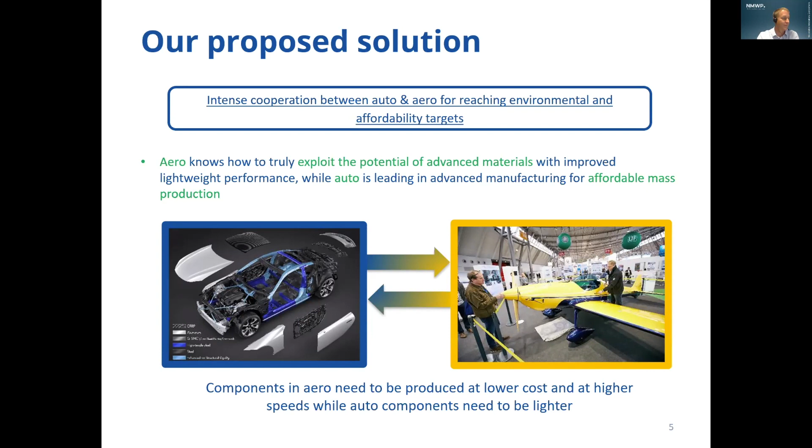We have the opinion that components in aero need to be produced at lower costs on the one side and at higher speeds, and auto components need to be lighter to reduce carbon, for example. So the main objective is to increase the competitiveness of auto and aero SMEs. It's about delivering new lightweight solutions that meet environmental and affordability targets, supporting auto and aero SMEs in improving their lightweight products and technologies to meet car and aircraft makers' needs, and setting up a transnational ecosystem that connects stakeholders from both industries to boost cross-sectoral transfer of knowledge.

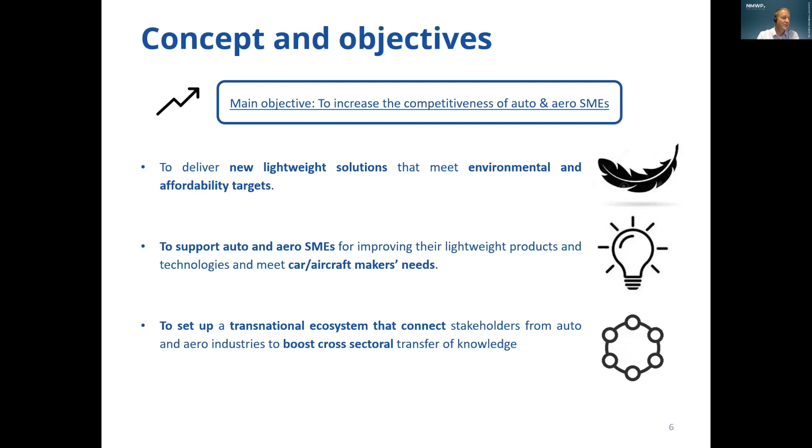Now, how would we like to do this? First of all, we have these challenge-driven competitions. We have international enterprises who provided challenge-driven competitions to us. Thematic challenges proposed by end users and large suppliers from automotive and aerospace sectors. And now the small and medium enterprises can apply with an innovative solution.

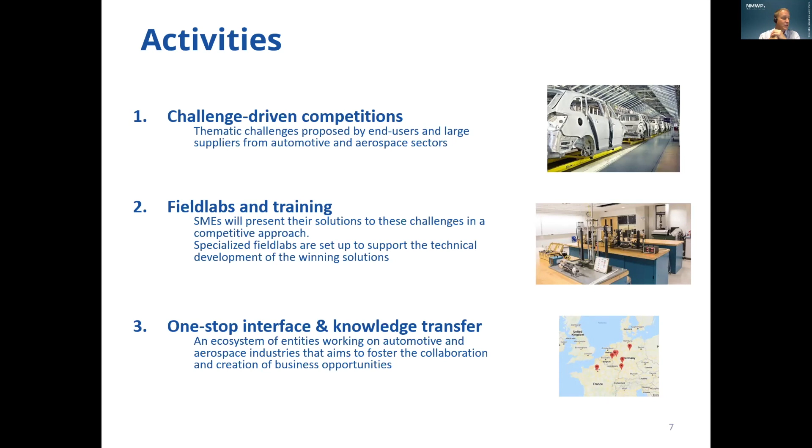The next activity is our field labs and trainings. We provide the possibility to present the solutions to these challenges in a competitive approach. And specialized field labs are set up to support the technical development of the winning solutions. There will be a jury which will award the solutions provided. And then next, we will have a one-stop interface and knowledge transfer, which will be done online in a tool provided by us, NMWP.

And I think this is RIGHTWEIGHT in a nutshell. We have two industries very dependent on lightweight, which should benefit from each other from the solutions they developed. Before we come to the challenges, we would like to introduce the KIT on the one hand and NMWP.NRW on the other hand. So now I would like to hand over to the presentation of Markus Spadinger, who will present the KIT and give a short overview about the state of the art of lightweight constructions.

Is that right? I think so. Yes, it is. Thank you, Henrik. Perfect.

Very good. So yes, I'm also a part of the RIGHTWEIGHT consortium. I also initiated parts of the project back when we first met in Brussels almost 2 years ago, I think. And now I want to start with a short presentation on the KIT, especially on the IPEK. This is my institute where I'm working. My name is Markus Spadinger, as Henrik already introduced me, and I'm chief engineer here at the IPEK, and I'm responsible for the CAE optimization group as well as for the development methods and management group. I'm trying to share my screen, should be possible, I think.

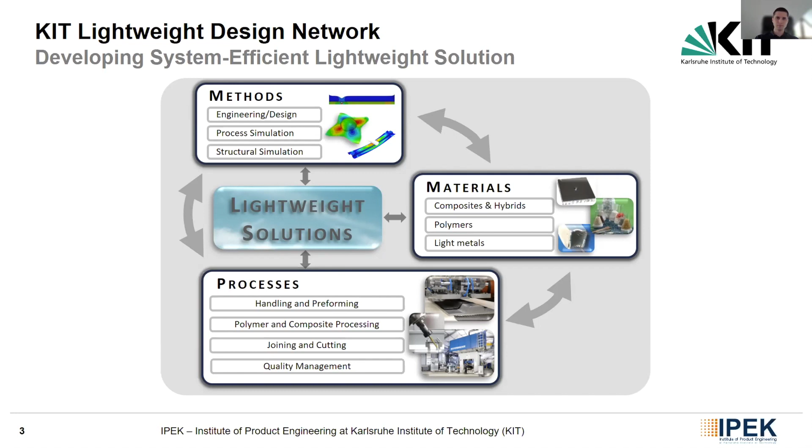But why is lightweight design still, or especially today, that important? I brought here some numbers. I updated it this morning to look into the numbers of 2020. 2021 is not available yet, but I think it's pretty impressive that over the last 60 years, we doubled the mass of our vehicles, and we also increased the power of our vehicles by a factor of 4.

And I think looking at the higher mass shows us that it is necessary to be more efficient in the future, that we have to find new lightweight design solutions, especially for battery-driven vehicles like a BEV or plug-in hybrid vehicles. We need to find solutions for the higher masses of the batteries that we have to carry around in our vehicles today. I think an important part of this development is caused by the fact that we need to include batteries into our vehicles today.

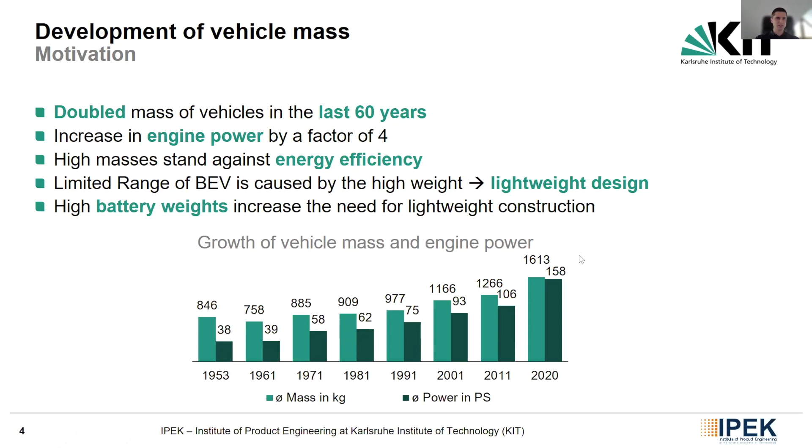Those are, of course, numbers from the automotive industry, but this also applies in many cases for the aeronautic industries. Today we are thinking about having batteries in airplanes as well. We need to find solutions then to minimize the weight of our aircraft as well. And this, I think, is the same reason for lightweight design approaches, as we can see it all over.

So here just one example of the projects we worked on in the past. Of course we need new structural materials as they had been included in battery electric vehicles like the i8 from BMW, but as well the i3, for example. But this is only possible if you include new construction and design methods, so that you have engineers that are able to apply those new materials to their specific use cases and to fulfill specific functions.

So from our point of view, lightweight design influences all activities in the design process. It's not just about replacing material. It's not just about having a new manufacturing process. It's all about having the right engineering process behind it to be able to exploit the full potential of lightweight design.

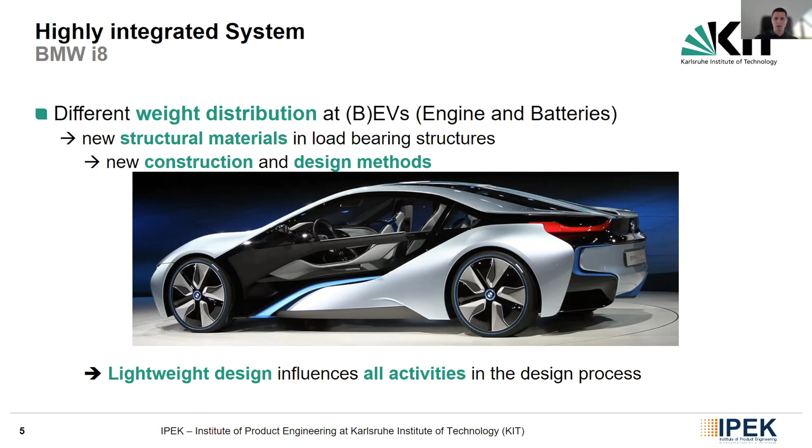Another example we worked on, and I want to use it to emphasize the different lightweight strategies that are well known to develop new vehicle generations. I'm talking about product generations in my short presentation. That means we are not developing our products from scratch, not based on a blank sheet of paper. We always start to develop based on reference, on previous product generations, on predecessor systems.

And of course, when we have the challenge to reduce the vehicle weight, we can change material. We can change the connections between our different components and parts. We can also optimize the shape, so the embodiment of different components, for example via topology optimization.

We can also go into more complicated ideas and conceptual parts like integrating functions, to reduce the amount of components. Or if it's possible, we can also think about the requirements. Is it possible to reduce comfort? But of course, nowadays, most product development processes aim at more comfort and more safety. So reducing requirements normally isn't possible within the projects we see.

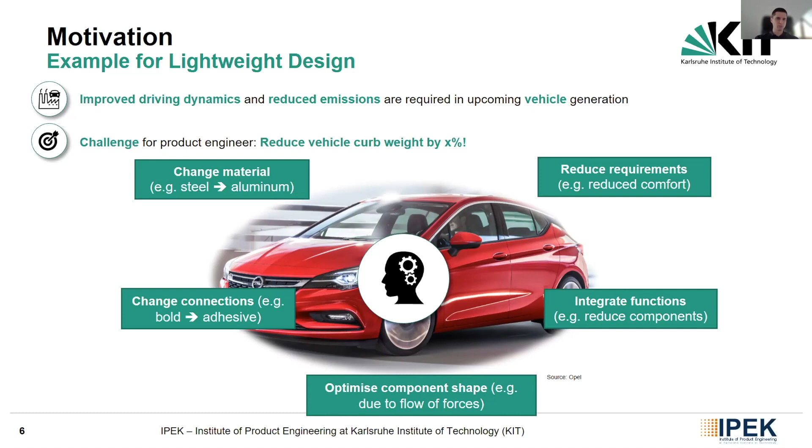So here are the different lightweight design strategies. I just want to link this with the different lightweight strategies as material, manufacturing, form, system, and conditional lightweight design strategy, which are, I think, more or less commonly known through literature. There are some other approaches, but I think most of us will agree that those are the possibilities we

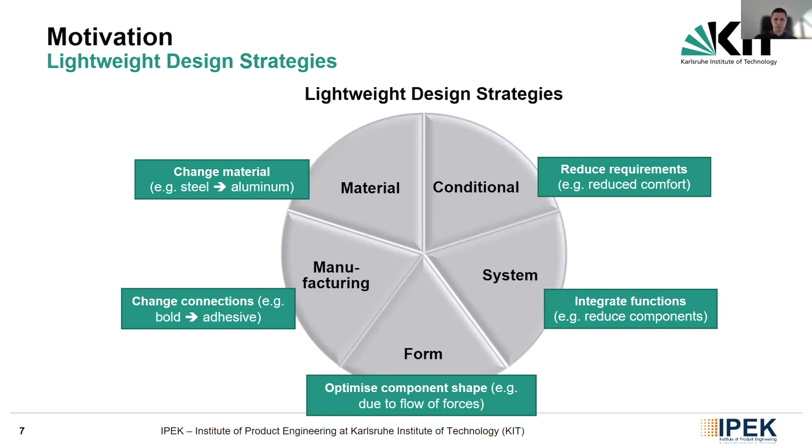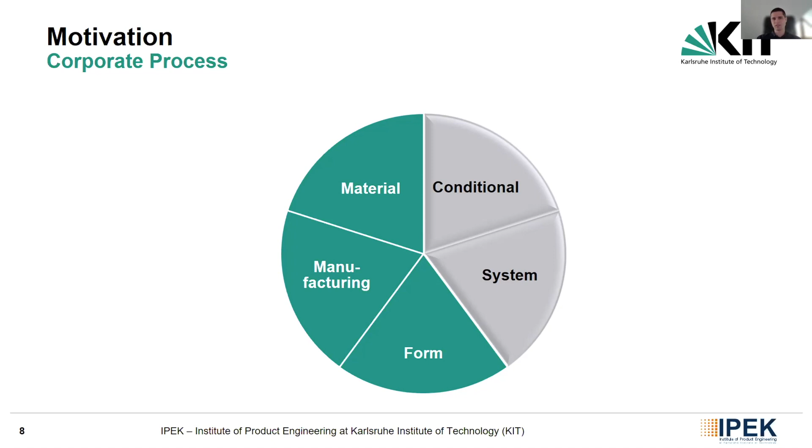have in lightweight design. So we here at the IPEK, we focus, of course, on those three lightweight design strategies, so material, manufacturing, and form lightweight design. That means, of course, this is also how many corporates work. They are structured in different subsystems, and this is a typical task we also fulfill here at the IPEK, at the KIT. So we are trying to focus on a specific subsystem.

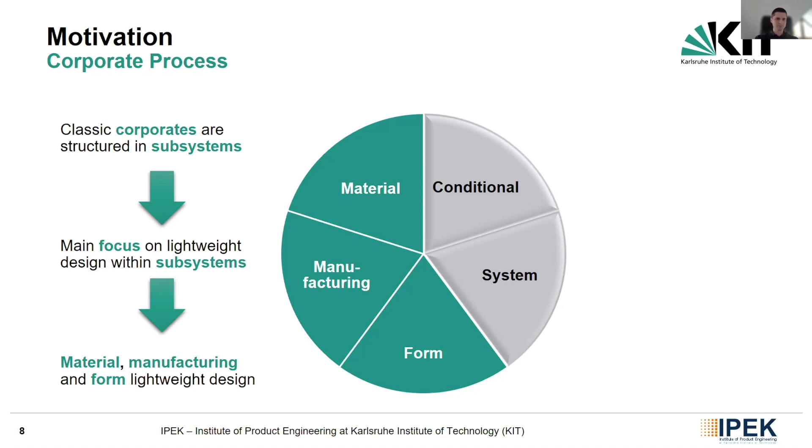So for example, a control arm and a suspension of a vehicle, or a specific part of the chassis. And then we try to get as much out of it as possible. So we are trying to find the right material for the function. We try to find the right design for it. But this, of course, focuses only on material, manufacturing and form lightweight design.

So what are specific approaches we are using? Today, of course, fiber reinforced polymers, so in short FRPs, have a really growing market. We could see this when we started with our first project about 10 years ago, where we started to research methods for how to include the manufacturing process into a design process. So in this case here, we are including mold filling simulations into a topology optimization process

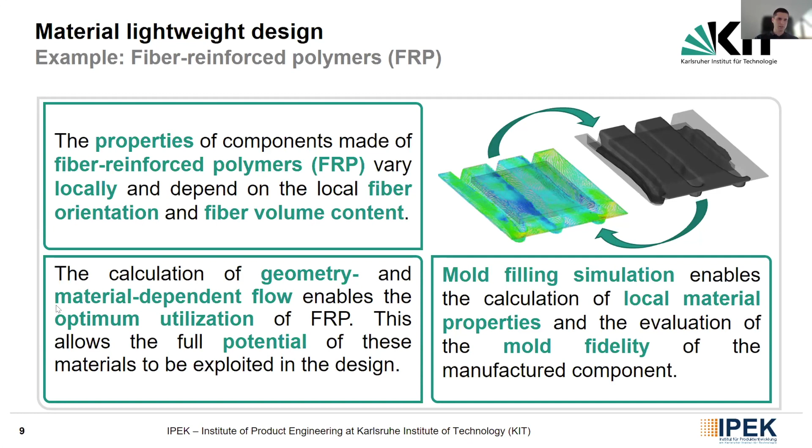in an iterative way. This is shown by this picture on the top right side here. And by doing so, we are able to include the fiber directions we are having here. So we are using long fibers, for example carbon fibers or glass fibers. And we are able to predict the material behavior within the optimization process. This allows us to optimally use this material behavior for our dedicated function and to transfer our forces through our part later.

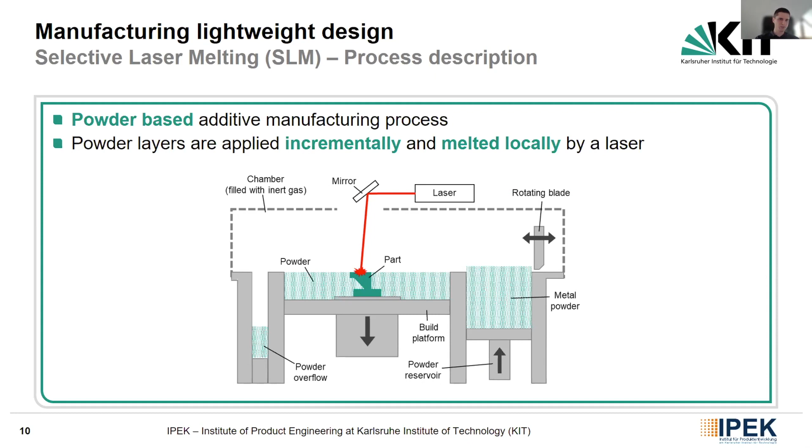Another example of how we can include different manufacturing processes into our design process is shown here for the selective laser melting process. I think most of you know the 3D printing process that is shown here. I just brought it to give you a short impulse on it. This material is printed in layers, of course, and those layers later have an influence on the material behavior we can see.

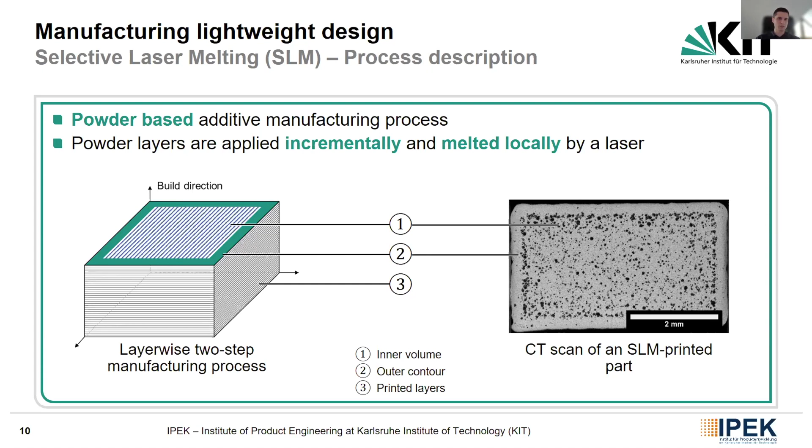And there we decided to have three different zones. We have the inner volume, the outer contour, and the different printed layers that are shown on the left-hand side. And we are measuring the material behavior together with a partner institute here at KIT. Then we are including this material behavior, which is laid over our different structural parts, within a topology optimization. This is shown here. This is the process for it.

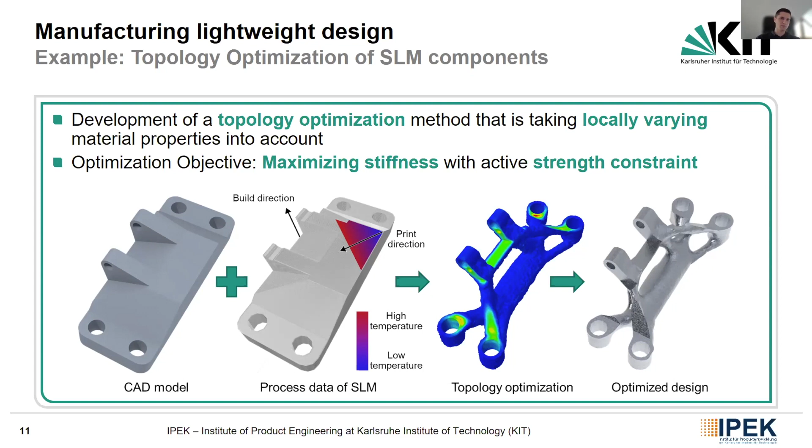Another approach we're following here at the IPEK is the optimization of thin-walled structures. So we are introducing beads to the structures and increase the stiffness. And also there, if you think about using fiber reinforced polymers, for example, but even using just steel, there's an influence from the manufacturing process, and this also can be included into the bead optimization process, which is currently done within, I think, 2 or 3 projects here at IPEK.

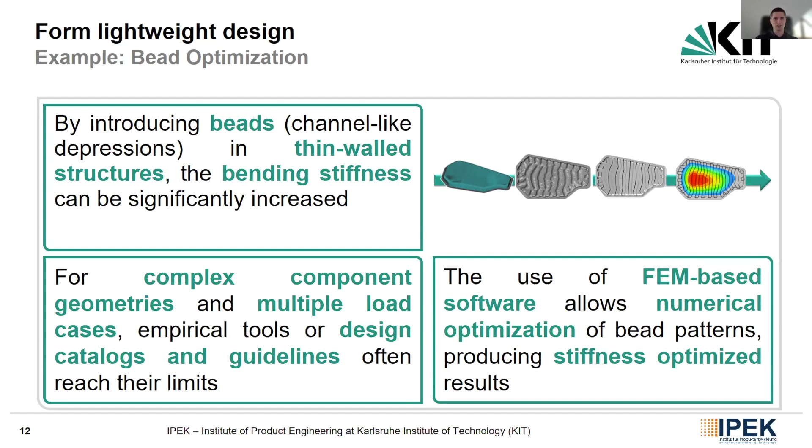As I mentioned, of course, those 3 different lightweight design strategies are necessary and important, but there's also more, I think, and this more is to combine it on a cross-subsystem approach so that we can include all the lightweight potential within projects which overcome those boundaries I mentioned before, so that we can find the overall system optimum and not just local optima as we do in the approaches shown before.

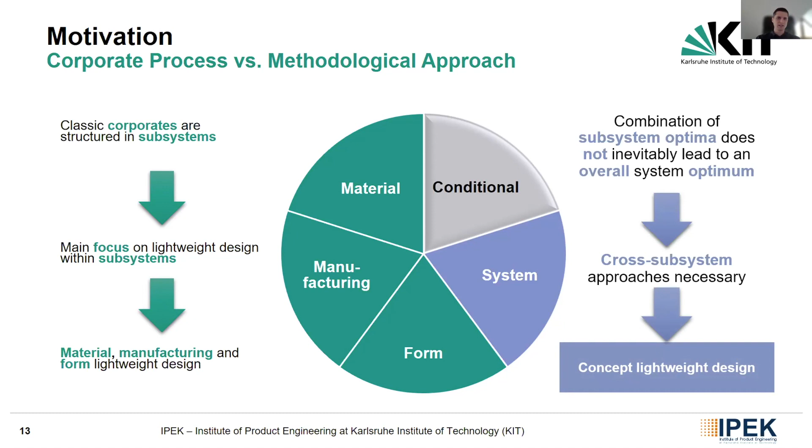This is called concept lightweight design here at the IPEK. And one of the approaches we are using here is the extended target weighing approach. This extended target weighing approach is shown on the right side. I know this is too much information to fully understand it. What you need to understand, I think, is we start with a product generation we already have.

Then we analyze the different functions of this product generation. And also we analyze our efforts. So we include the mass, of course, in lightweight design of our product, but we are also analyzing its costs and its CO2 emissions within those projects. And this enables us to calculate the effort of one function, and then we can decide where lightweight design is necessary and useful, where it is also useful from an environmental point of view.

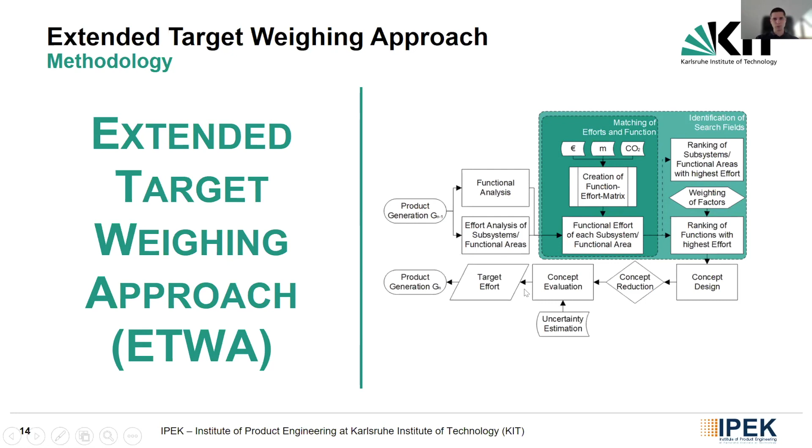And then we go through this complete process and end with a new product generation in the end. So that's just in short what we do here. I brought 2 examples. One of those examples is the high voltage battery we optimized a couple of years ago. There we had to reduce the weight of this battery by 20%. Of course, we did it not just alone at our institute. We worked together in a bigger consortium.

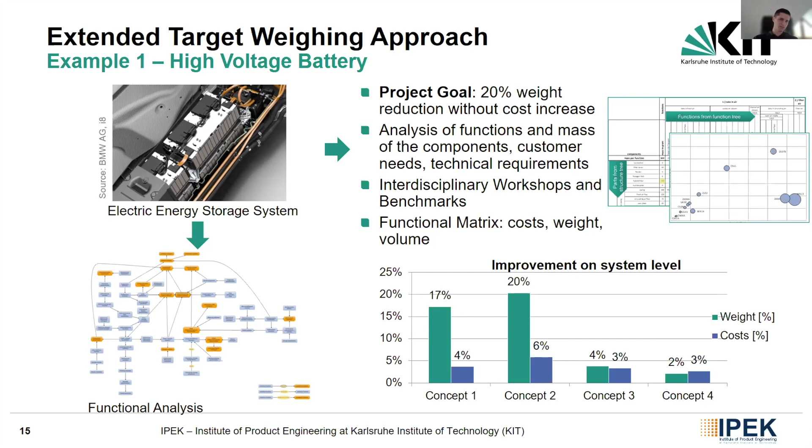But what you can see is that we are already in a really early phase of the product development process. So here in the concept phase, we can compare different concept solutions and decide based on weight and costs in this example which is the best solution in the end. The same had been done for this high voltage battery. It's a different car manufacturer than you had seen before.

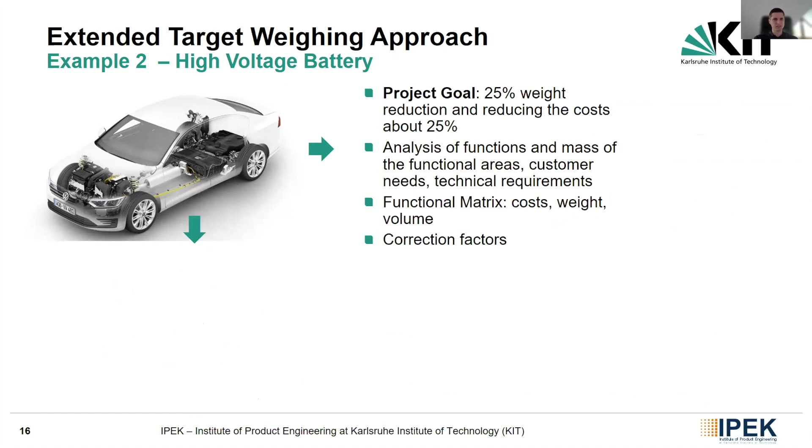There, we had been even more ambitious at this time. We tried to reduce it by 25% in this project. This had been done completely by IPEK, I think around 6 or 7 years ago. It was one of my earliest projects here at KIT. And here we had also a part of a battery, just the housing. And there we developed an approach to analyze different functional areas.

We developed different correction factors. And also here we came up with different possible solutions. So we started first with just conceptual drawings made by hand, and then had different solutions more detailed in CAD, and could decide what is possible towards the mass we need to reduce.

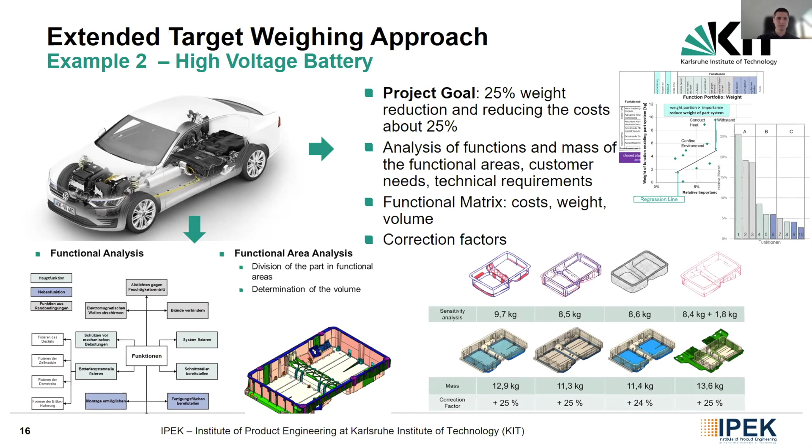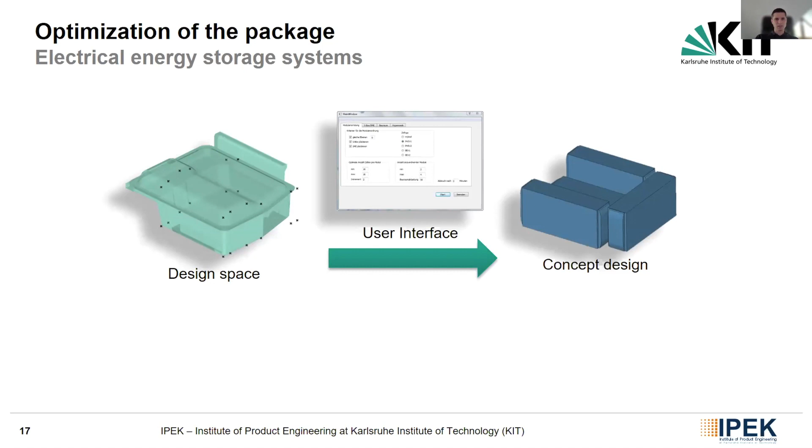Then we had further projects in electrical energy storage systems where we tried to find new solutions also based on combining different methods, like, for example, topology optimization together with a packaging algorithm that had been developed. We started with the initial design space and developed a first concept design. And there we could have an easy ranking of different concept solutions, so where to apply how many cells, for example, in this energy storage system. And we could also automatically evaluate how the later mass and the structural behavior of this component will be.

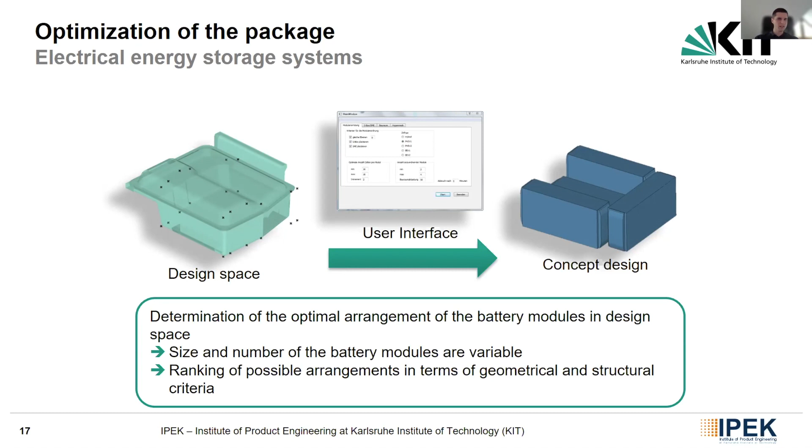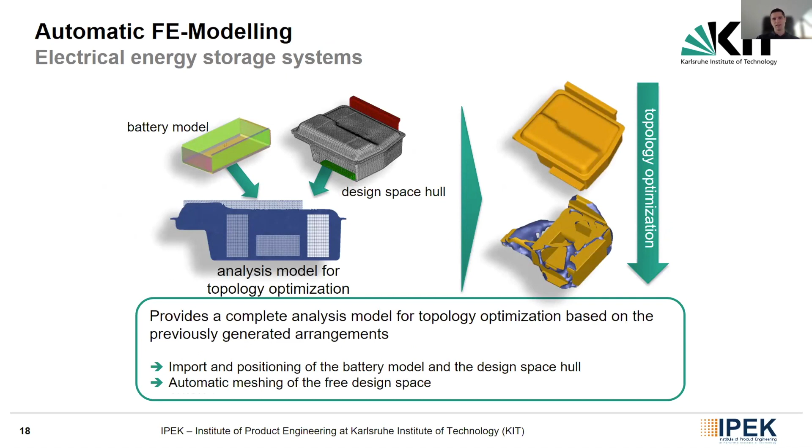This had been done, as you can see here, by topology optimization. We included our battery model and our design space into a complete analysis model. And then we had in the end different suggestions of our structure and could compare which is more suitable than others in the aspect of lightweight design. Here are some more exemplary solutions to that.

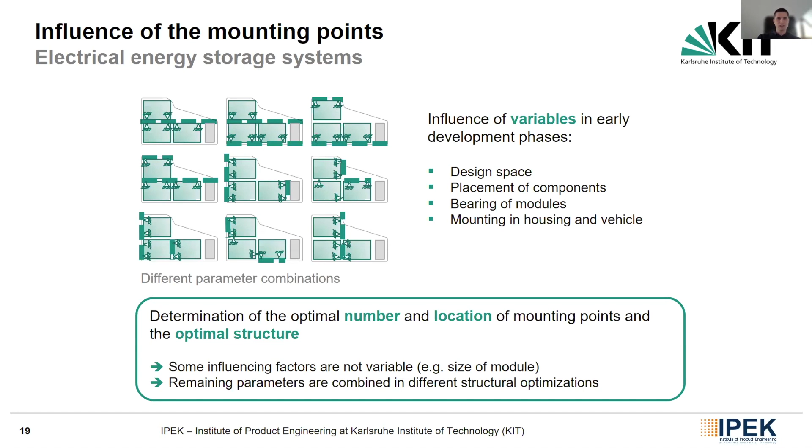And to not exceed my time too much, I will leave it here and just motivate using the methodologies. For example, to have a design approach, then go into CAD, then go into calculations or FEM models and try to find your best solution is not always the best process. Sometimes it also makes sense to introduce methods and tools like topology optimization to really early parts of the product development process and try to find the best concepts and compare different concepts as shown here.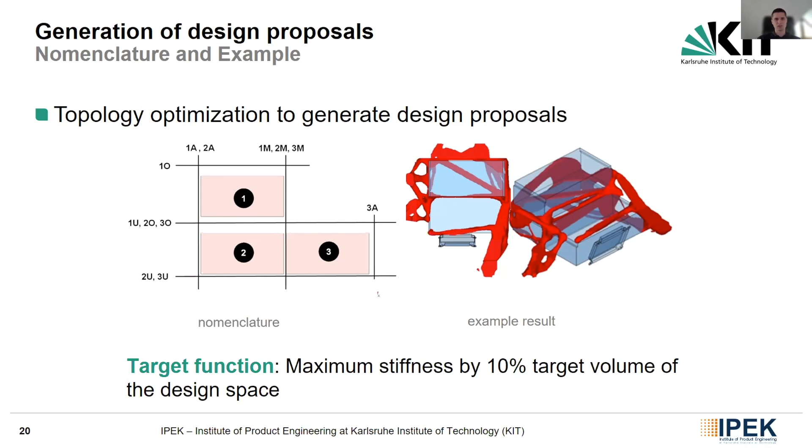So to conclude my short introduction on how we see lightweight design, I want to motivate that it's important to think in product generations. So you have to use the information you have from predecessor systems. You have to find a way to manage your knowledge in a sufficient way to make your knowledge applicable to new solutions. This can be done by systematic views, by integrating material, computational methods, modern processes, and this leads in the end to the chance at least to exploit the full existing lightweight potential by a systematic approach, by a concept lightweight design approach.

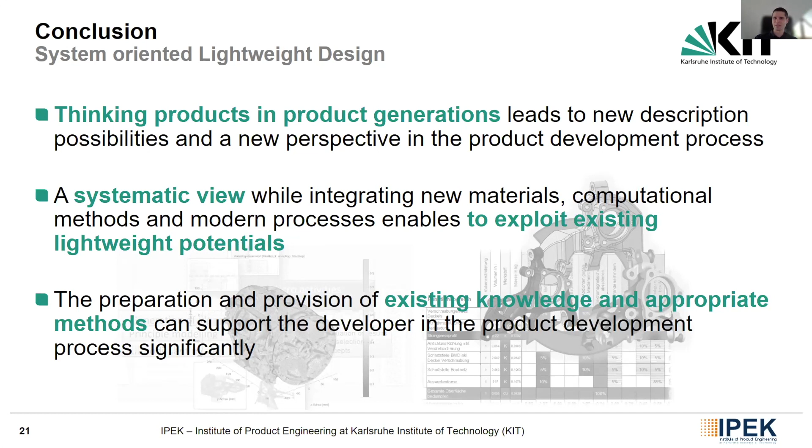So thank you very much. I hope I didn't exceed my time too much, and I'm looking forward to the really interesting challenges, and first of all to the introduction of the NMWP, I think by you, Matthias, right? No, it's by me. So thank you very much. Everything's fine. Thank you very much for your presentation. Okay, so then I will go on and we will have a short presentation about the cluster NMWP.NRW. Hold on a second. I have to share my screen. It's this one. Share.

So the cluster NMWP.NRW. First of all, about North Rhine-Westphalia, it's in Germany. It's classic. It's the land of which industry is focusing on materials. And we, as the cluster NanoMicroMaterialsPhotonics, materials is one very important part of this. First of all, I would like to give you a short introduction about key facts about the clusters in NRW. So what are clusters in NRW?

The state policy is promoting a sustainable industrial development and addressing the lead markets. Clusters are a pivotal instrument for the state's strategy. So the clusters act as a link between science and industries and politics. We are identifying emerging technologies, and we promote innovation and visibility in 8 lead markets. Clusters are expected to develop cross-regional initiatives, both enterprises and universities, to increase the dynamics of innovation.

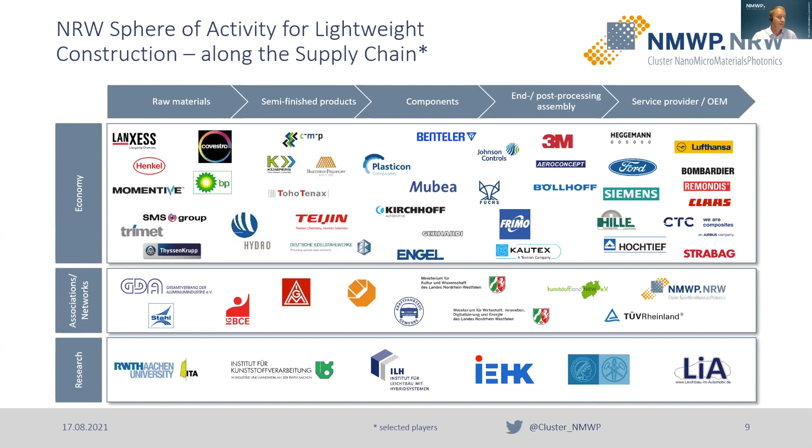There are several networks, and we have a very strong expertise in research in North Rhine-Westphalia. RWTH Aachen is one of the bigger universities. We have also smaller universities and also institutes, a lot of Fraunhofers which are involved in lightweight construction.

So how can we be of service for you? You can benefit from our services. We have strategic consulting and support for setting up technology-driven cooperations and businesses with partners in North Rhine-Westphalia. We have a strong network, so we can give advice in this. Also, we have guidance. We have an overview of North Rhine-Westphalia's economic and research landscape, so we can help you with this as well. Advice on specific NMWP related topics and possibilities for grants also. And we have also a certain link to the policy community.

So this is NMWP in a nutshell. And Markus said in his presentation, lightweight influences all sectors of engineering and design. And I think I can conclude that the key enabling technologies, nano, micro, materials, and photonics, and also quantum technologies, have a strong influence on every industry and also on every part of lightweight constructions. And with this, I would like to end, because lightweight has already been presented.

And then I would go back to the last presentation, and then we can go on with the challenges we have. So give me 1 second, please. Start the presentation. Okay. So now I think we can go on. Matthias, do you want to start with the challenges, or who wants to start? Yes, I would go through the first set and then hand over to our partners. Okay, perfect. So then the floor is yours.

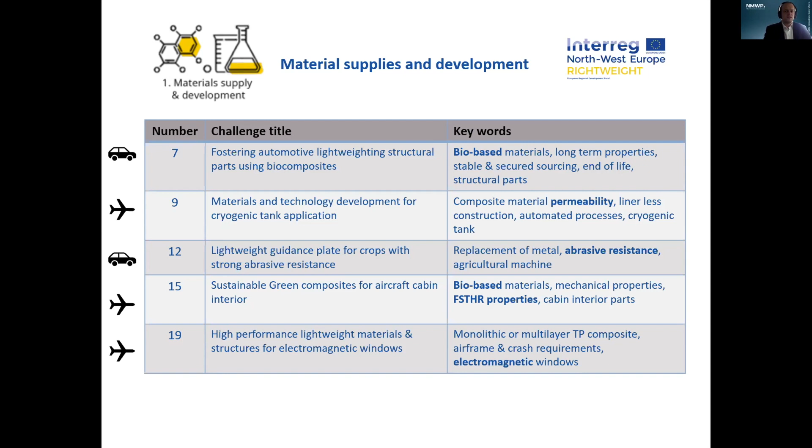Yes, exactly. That would be challenge number 9, which is cryogenic material applications. As we know, more and more alternative fuel usage is promoted in aerospace, and it's already used in space applications. There's the need for new materials for cryogenic tanks. The scope of the challenge is that a resin system is necessary with matching thermoset, thermoplastics, and definitely high temperature and chemical stability.

Here on the right, maybe some recognize it, this bluish color, it's liquid oxygen that's pretty cold and also pretty reactive. So it has some high obstacles that need to be overcome for the material. The current production technologies are filament winding or automated fiber placement, automatic tape laying, or laser-assisted tape laying. All of them have some benefits and some drawbacks.

For example, the 2 blocks shown here in the middle: the resin either has a high permeability, which is not so beneficial for storing the fuel that is slowly turning to gas inside, while the low permeability is much better. Also for the cryogenic application, of course, because the temperature change will decrease if it's low permeability.

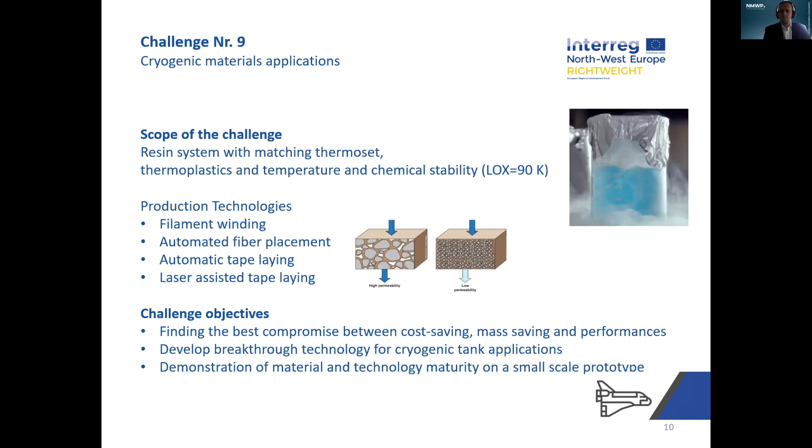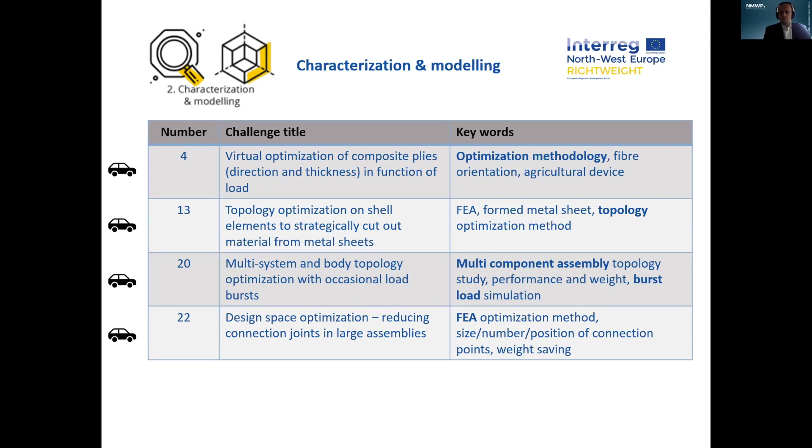Yep. Then the next set of challenge topics, next slide, please, is characterization and modeling. As we saw in the IPEK presentation already, the modeling before building the part is very important, and can always improve the lightweight properties of the component. On the next slide, it's not exactly automotive, but it's basically the same area. We have agricultural machines, and there challenge number 13 is topology optimization on shell elements to strategically cut out material from metal sheets.

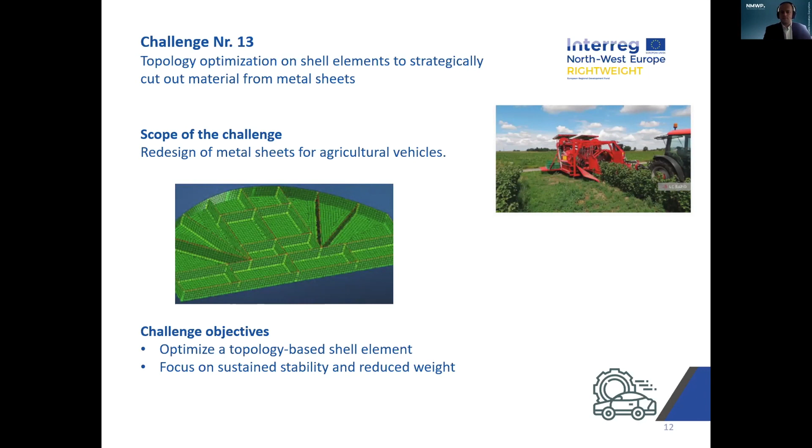So these cover metal sheets exist, but they should be reduced in terms of weight. So redesign of the metal sheets is necessary. And here the challenge objective would be to optimize the topology-based shell element and keep the stability but reduce weight. Yes. Next slide, please. Exactly.

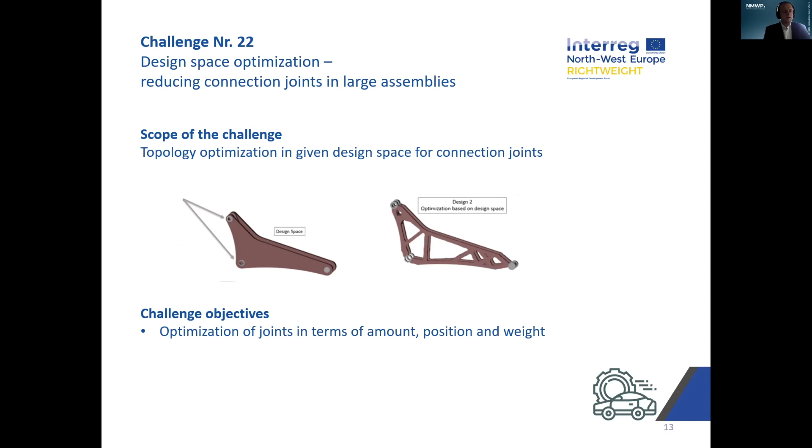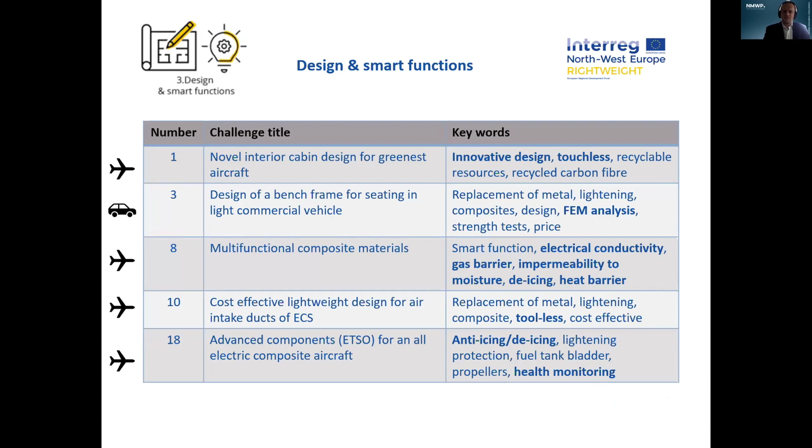Yes, the third topic of challenges is about design and smart functions. It's more and more common that the material is not just a simple material, but of course it has more elevated functions. On the next slide, as people who are familiar with aerospace know, there are the European Technical Standard Orders, ETSO, so components that will be developed need to be certified.

And here the target is to develop an all-electric composite aircraft, whereas, in open discussion with the challenge owner, these advanced components shall be designed and cost-effective solutions shall be proposed. So there are different possible objectives. Not all will be done in one challenge, but it's open to discussion.

If you apply, you can get in contact with the challenge owner and do something like an effective aircraft design thanks to advanced composites. You can do some system integration, develop a health monitoring system for the composite and the overall system. And finally, that should lead to the transition of an all-electric aircraft that is newly designed and highly lightweight.

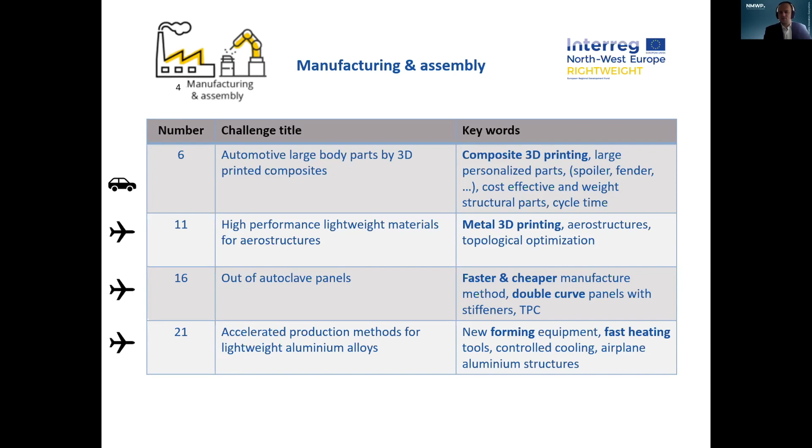On the next slide, yes, there we are on topic number 4, manufacturing and assembly. As we had before, automotive has high-volume production, but aerospace is sometimes, let's say, slower or more special in assembly and manufacturing. So they should learn from each other.

And that's what we have in the next slide, please, which is challenge number 11, high performance lightweight materials for aerostructures. There are material and building components already in use, but topology optimization is necessary. It is highly desired that interchangeability with existing parts is given. The idea would be to use newer composite materials instead of the currently used steel parts, and/or combined with 3D metallic printing to allow even better topologies.

So this is basically also the challenge objective: lattice 3D printed metallic structures, and a cooperation to finalize a technology partnership to then develop a sample or prototype is desired.

The next challenge is out-of-autoclave panels. Autoclave is a technique that takes quite a lot of time, but gives very nice results. Nowadays, many thermoplastic composites are manufactured in autoclave to consolidate the properties. But autoclave takes a lot of time. So there is the state-of-the-art data here.

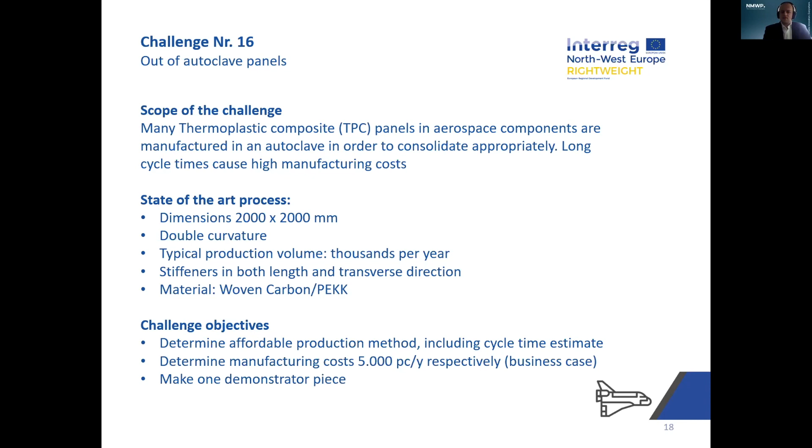If somebody has a nice idea, the challenge objectives would be to find an affordable production method with a shorter cycle time, then determine the manufacturing costs respectively, and then produce one demonstrator so it can be thoroughly tested afterwards.

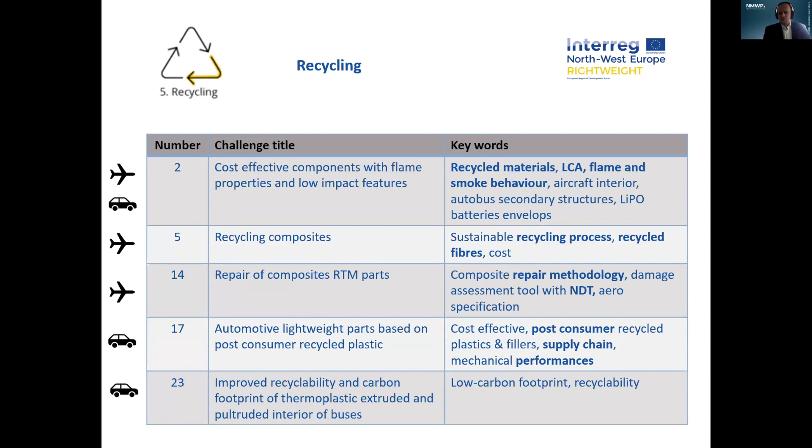The fifth topic is recycling. It's not just about producing something lightweight from an unrecyclable or not so environmentally friendly material; recycling becomes ever more important. And here we have on the next slide the repair of composite RTM parts. Most often a composite material, if damaged, has to be replaced completely because of the nature of the composite. But this is very costly and not cost efficient.

As everybody can imagine, there's the danger of damage through small objects, especially in aerospace. It would be nice to find an in-field solution without the necessity to disassemble the plane, for example. This would of course extend the life cycle of the repaired part, but also of the whole system.

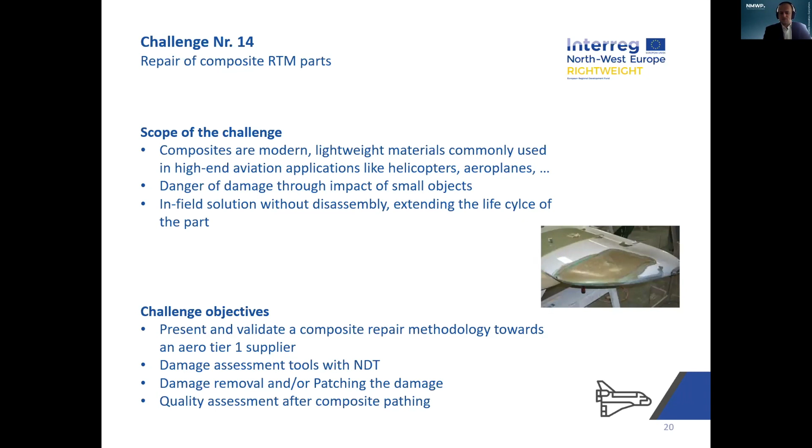Challenge applicants should present and validate a composite repair methodology towards an aero tier 1 supplier. It would be necessary to present a damage assessment tool with non-destructive technologies, a damage removal or patching of damaged composite materials, and a methodology for quality assessment of the repaired composite part.

Okay, yes, and I came here this morning by bus, so I'm pretty familiar with this one.

Improved recyclability and carbon footprint of thermoplastic extruded and pultruded interiors of buses. There's a lot of plastic structuring around, and a lightweight, cost-effective, low carbon footprint solution is desired. The state of the art: once you're in a bus, a lot of the covering material is some polymer. The roof ducts, for example, are made from continuous 2D profiles, and the 3D hatches for warm summer days.

Currently, they have a high weight because they have a certain stiffness to achieve, and they are from materials that have a low recyclability. When thinking about that, the challenge owner said the ballpark volumes are roughly 75 to 100 kilometers per year. It's a flowing process, and for 3D hatches, it's 75 to 100,000 parts per year. So it's quite a volume.

So the objective would, of course, be to evaluate the design, topology optimization, structure optimization, but material and the mechanical properties, and of course, find a new material class with a lower carbon footprint, if possible. Then present a feasible demonstrator, or maybe already a small series production to verify the project, and then supply the part for series production.

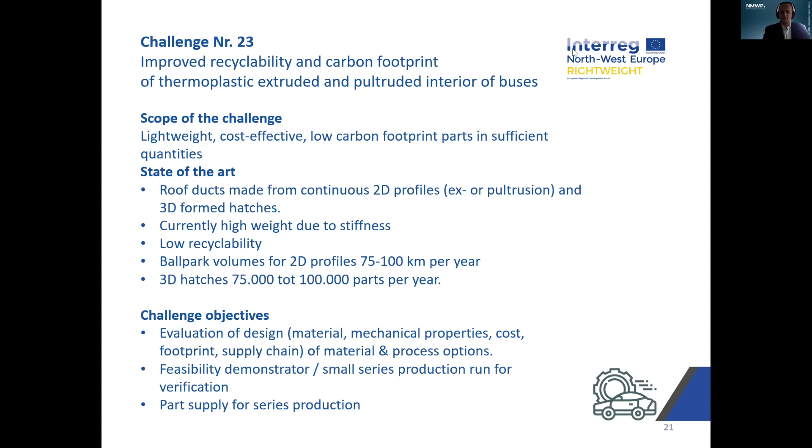Okay, so we will proceed with the next challenges. So we will not present it based on our different slides. We will start by also introducing to you our homepage of the RIGHTWEIGHT project. So this is the central site. You already had seen that there are different cross-cutting areas, which had been also introduced already by Matthias in his presentation. And what we are now going through are the different challenges here. So the cross-cutting areas will also be highlighted in the different challenges.

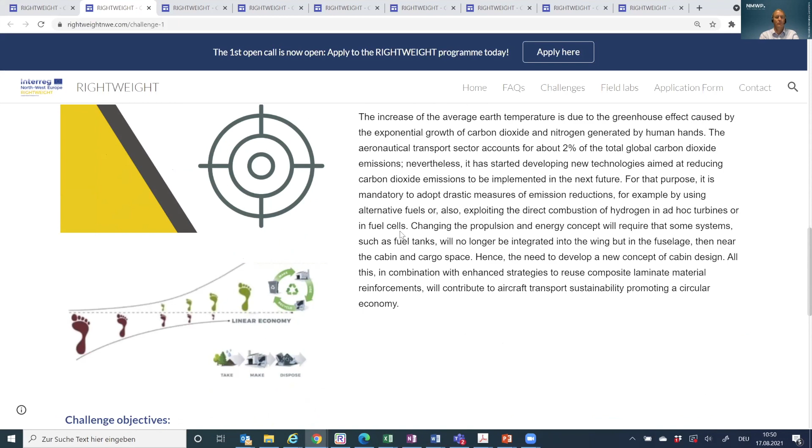So the main section of application of this challenge number 1 is, of course, aeronautics, and cross-cutting topics are almost everyone you had seen before on the first web page I showed to you. So we have material and supply development, design and smart functions, manufacturing assembly, as well as recycling. So here is some more information about the scope. As I mentioned before, the challenge giver wants to go into a circular and green economy by also reducing, of course, the CO2 footprint of the aircraft and the aircraft design.

So again, the challenge objectives here are to extend the usage of recyclable material, so that in the end they are 70 up to 100% recyclable and made out of recyclable material. The fuel consumption within the overall weight reduction is between 8 and 12%, which should be decreased. And of course, the RC costs should be reduced by at least 5%.

Okay, that's it about challenge number 1. Then we go to challenge 2, which will be presented by my colleague, Patrick Haberkamp. Thank you for the introduction.

Yes, so the second challenge is on the topic of cost-effective components for aero and auto transportation, but with the small change that we need also the flame properties and low impact features. So as often used in today's aircraft or automotive sectors, also here the use of composite and polymeric materials is the central part of this challenge.

So additionally, we need to take into account the process reliability and also cost effectiveness, as well as the environmental aspect of the materials. Since in this challenge, the challenge owner likes to develop aircraft interior components as well as autobus secondary components, we also need to fulfill the requirements for structure, for the flame resistance, which is especially for aircraft interiors very important, as well as smoke behavior. We need to find new solutions for materials that can be applied here.

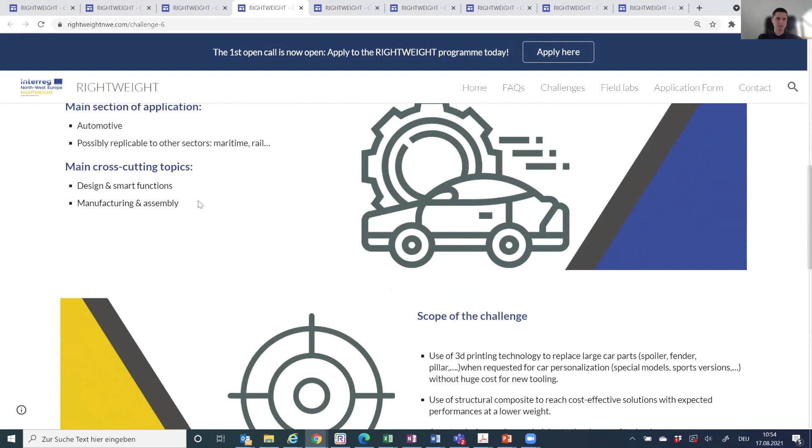So the company here is CRF, which also is stated here, and they want especially to evaluate and assess the new technological solutions here. The main sections of applications are automotive, and maybe they think about also applying it to other sectors like maritime, railway, maybe even aircraft. And the main cross-cutting topics here are design and smart functions, as well as manufacturing and assembly.

So the scope, as mentioned before, is the use of 3D printing technologies to replace large car parts, so not just smaller components as it had been done before. So they're thinking about parts like spoilers, fenders, or the pillar, and also to think about how they can use it to personalize the cars or the components they deliver for the cars. So they think about special models, sport versions, without huge costs for new toolings.

Furthermore, they want to use structural composites to reach cost-effective solutions with expected performances at lower weight. So they think about, of course, also fiber reinforced polymers in the 3D printing process here, for example, and also necessary part redesign, which is based on the new technology for the manufacturing process.

So what are the challenge objectives? In a nutshell, they want to reduce the weight by 30% compared to steel parts, or by at least 10% compared to plastic parts, with the boundary condition that they will have more than 5,000 parts produced per year. So this should be also possible when you apply for this challenge here. Then I hand it over back to Patrick again with challenge number 10.

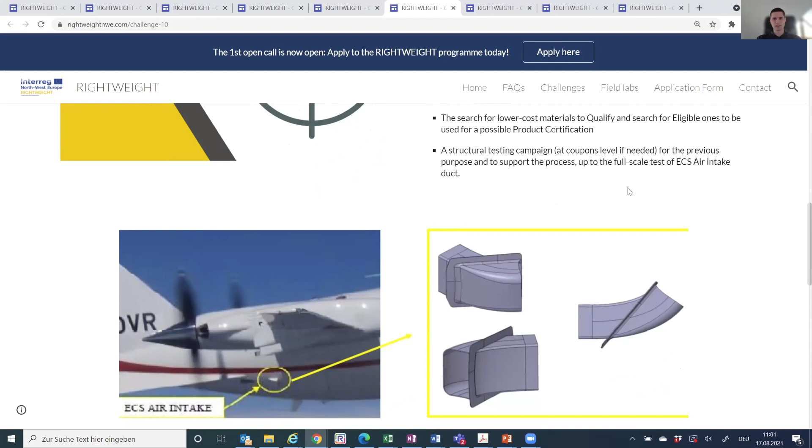So what is the scope? Processes that can be used for parts with complex shapes that are as monolithic as possible. So here failure is of course a big issue in this field of application. Then the search for lower cost materials to qualify, and search for eligible ones to be used for a possible product certification. And as mentioned before, the structural testing campaign should also be provided by applying to this challenge.

So again, the challenge objectives here are to realize the demonstrator in alternative material and process for this air intake duct for the ECS, based on the reference you have seen before on this challenge. The solution should come up with a weight reduction of 50 up to 60%, while reducing the cost by 10 to 15%, and including a method to qualify a material and process to be able to apply it to similar items. Furthermore, you should be able to come up with a supply chain which is able to supply this new part for the aeronautical branch.

So then I give it back to Patrick again. Yes. Able to change the slide.

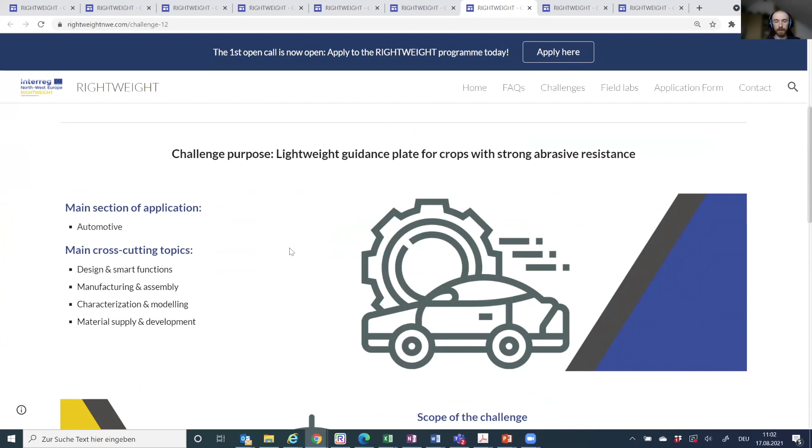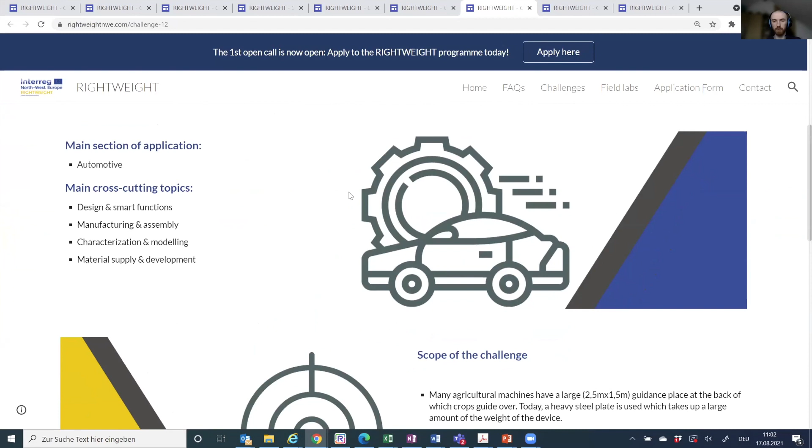Challenge number 12. Yes, so challenge number 12 is quite a specific challenge. It is on the guidance plate of agricultural machines that is commonly used, with dimensions of about 2.5 meters to 1.5 meters, and it's used to guide crops over. Today, this plate is usually made out of steel, and so it takes a large amount of the weight of the device. So the challenge objective here is to identify a lightweight material to decrease the weight of the component as well as of the system itself in total.

The clue of this challenge is also that we have a special requirement, since this plate is under an abrasive load from the crops that are gliding over this plate. And so we need these special requirements for the materials. And this is the scope of challenge number 12.

Okay, thank you, Patrick. So challenge number 24 now is also again in the field of buses. We had this one before. So here the idea is to develop a new crash structure for buses. So the idea is to increase the safety of a city bus.

And the initial state here is that most city buses are not that crash safe, especially for the driver. There are almost no regulations, as you might know it from the automotive industry, on the well-known crash tests. So here seems to be a lot to be done to increase the safety of the driver.

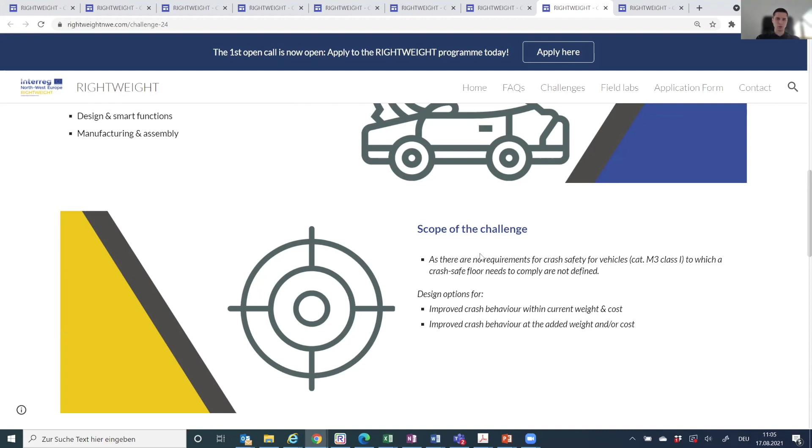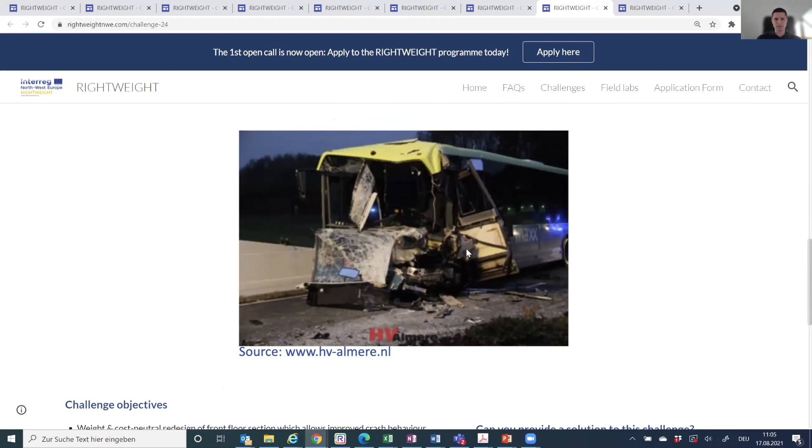And the idea is to improve the crash behavior of the bus while maintaining the current weight and cost of it. And there should be no added weight and cost if possible. You can see here one example of how it can look if it goes wrong, if there is a crash. And we are talking here about the bus floor structure, which is responsible for the main stiffness of this vehicle. And new solutions should focus on this floor structure here.

So once again, the challenge objectives are a weight and cost neutral redesign of the front floor section. So this is the part here, you can see, which allows to improve the crash behavior. There should be new additional crash features designed to improve safety, and it's also important to have a modular design because it's manufactured modularly. Here different suppliers are involved in this process.

So then for our last challenge, again, Patrick. Yes, so the purpose of challenge number 25 is the development of innovative aluminum lightweight components for green road mobility. So the challenge has the title Aluminize the World, and it is to enable sustainable and innovative solutions for the automotive industry. The target is to reduce CO2 emissions and support green mobility.

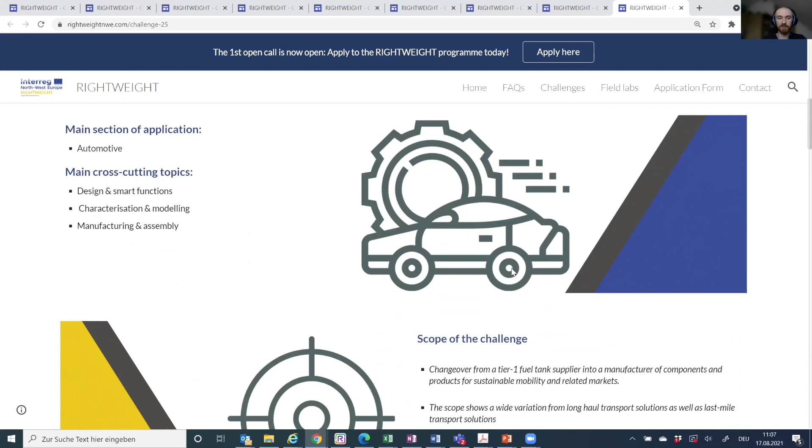We want to develop innovative lightweight components on the base of aluminum, and also develop innovative cryogenic tanks for long-haul transport applications to store liquid hydrogen. So as can be seen, the main section is the automotive section. The cross-cutting topics are design and smart functions, characterization and modeling, as well as manufacturing and assembly.

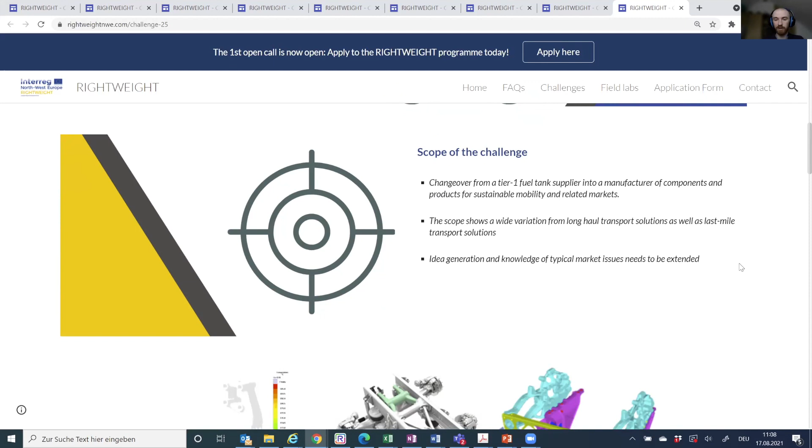The scope of the challenge is to help the challenge owner to change over from a tier 1 fuel tank supplier to a manufacturer of components in total for sustainable mobility. And here the scope is pretty wide, so it can be from long-haul transportation solutions to last-mile transport solutions. And important here is the idea generation and knowledge of typical market issues that need to be extended for the challenge owner.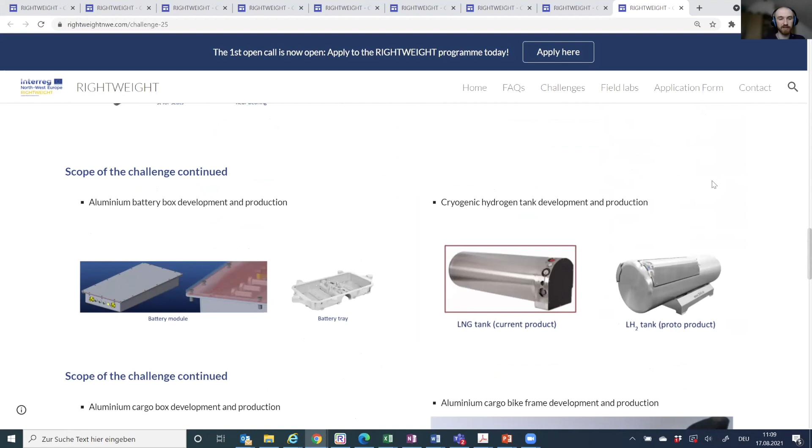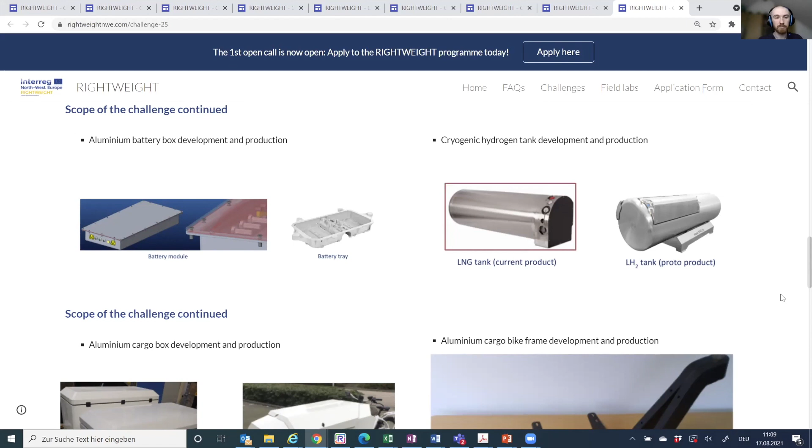Also here, a very current challenge is the use of aluminum for battery modules as a box, or the cryogenic hydrogen tank. So the challenge objectives are the production of aluminum battery boxes with a high range, so from 1,000 to 200,000 parts per year, and the challenge owner would like to have a cooperation with a battery cell production company, as well as a sustainable mobility customer.

The second objective is the development of lightweight aluminum components with the production system of rheo-casting, also with a range that is quite wide, so from 15,000 to 150,000 components per year. Also, the third objective is to develop new ideas for aluminum components and to establish a cooperation with sustainable mobility partners, and provide the production processes and services. So that's it for challenge number 25.

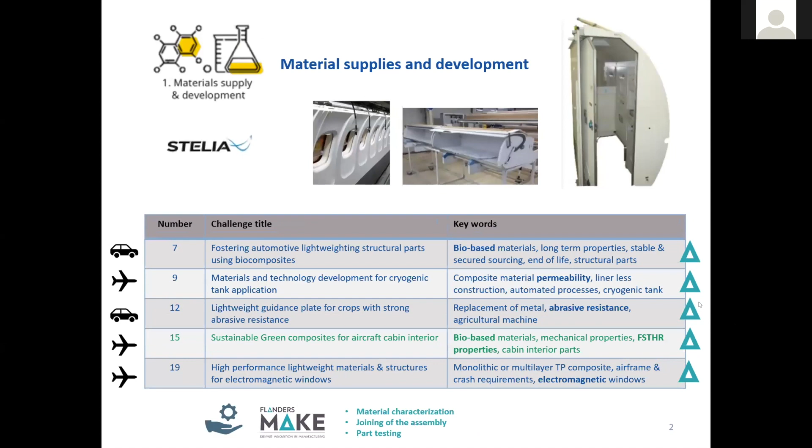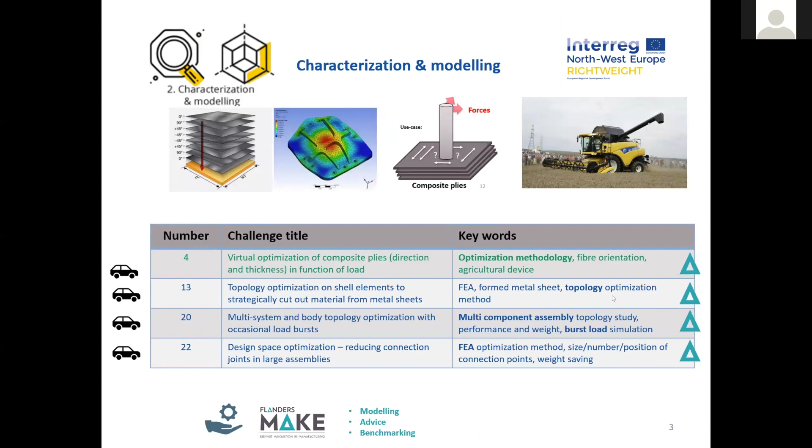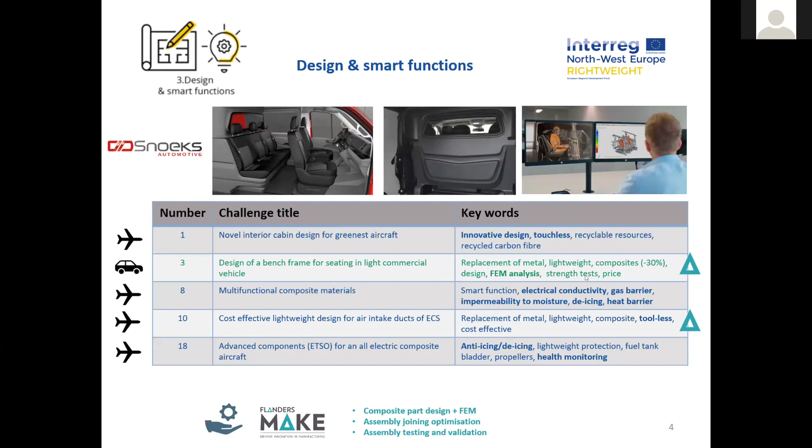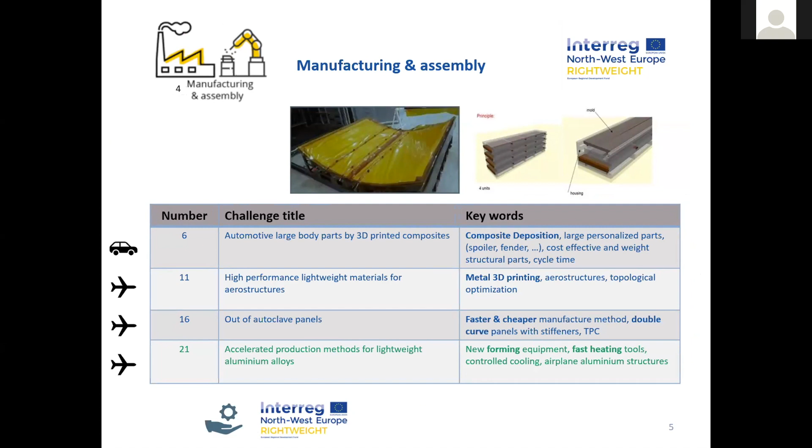As a reminder, biomaterials are something really interesting for us. Then we are interested in topology optimization that takes into account the composites and the fibers we are using in the composites, to really go deeper than just the shape of the parts. How we can replace metallic parts using composites and lightweight solutions. Then, to develop smart processes to do the forming of lightweight solutions, like how we can work with aluminium in a better way, or even with composites.

And finally, the recyclability of those products, because we don't gain a lot doing lightweight products if they are not recycled. So those are the 5 challenges that I want to present today. It's quite summarized, I didn't enter into all the details, but I think it can give you an idea of where we want to go here with the companies in Belgium.

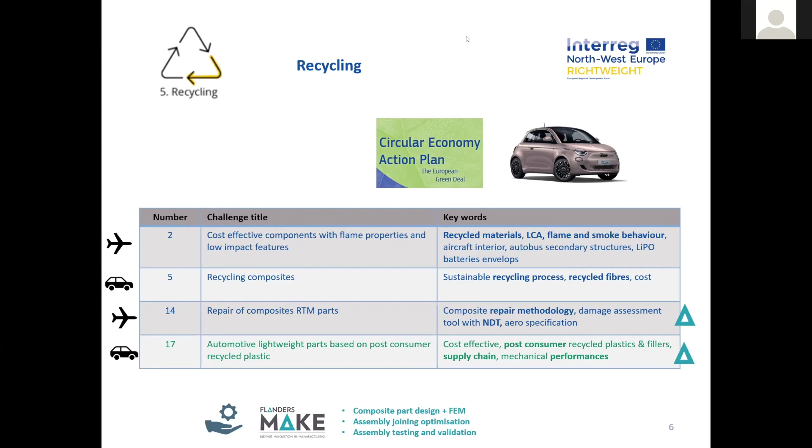Okay, thank you very much for your presentation. And now I would like to ask you, are there any questions until now for the challenges? I can share my screen again, and then I can say, wait, here are the challenges. So if you already have any questions which we can discuss right now, just raise your hand.

Wait, I need the overview of the participants. Okay, raise your hand or put your challenge into the chat, or maybe you can just activate your microphone, and I think we will be happy to give you as many answers as possible. I also put the link of the challenges website into the chat.

Peter Walker from Otto Fuchs KG. So the floor is yours. Hi, yes. Firstly, thank you very much for an interesting workshop so far. It's been very informative. I actually have two hats on today. One in my role as innovation manager at Otto Fuchs KG, and the other as a representative for a small startup based in the UK. And so I have a few questions regarding some of the challenges.

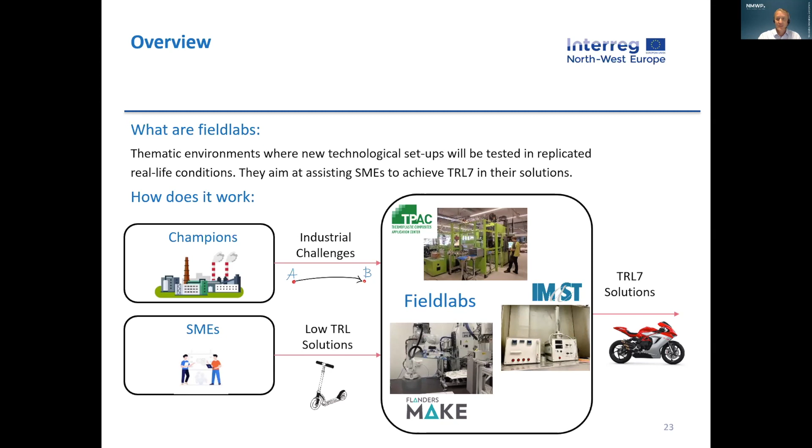So if you apply for one of the challenges, it would be as follows. The challenges are presented by RIGHTWEIGHT champions. Yeah, just in this case, not by the champions themselves, but by the partners. Then the application is open. As said, we have 2 application phases. One is running, but we have a second call for challenges, and then we will have these national workshops like this one. And as soon as the application phase is closed, we will evaluate the results, and then you can get a voucher scheme support.

And now, what happens next? There are two different ways, I think in the end three different ways, but the best solutions provided are these trailblazer SMEs. They will get a voucher of over 45,000 euros, and there you can get services in these field labs concerning design, modeling, simulation, automation, testing, and so on. Also IPR, business planning, some advisors, and these trailblazers should have an incubation up to TRL 7. And in the end, hopefully, they will have a route to market strategy and an investment plan.